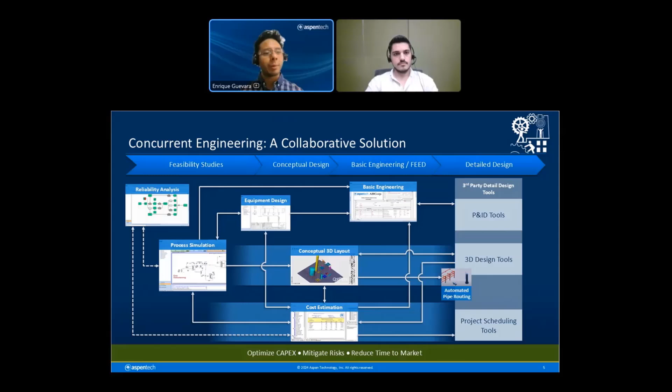So the idea of concurrent engineering is that we have all of these different integrations between these AspenTech solutions that allow us to keep data consistent. The information we get from simulation can seamlessly go to the cost estimate or to basic engineering for deliverables. And we are able to do this fast, reliably, and consistently. So this is a little overview of concurrent engineering, and a little later we're going to zoom in and show what part of this workflow Tekfen was able to use for their use cases.

Before that, I want to use this information about integration, collaboration, and a better, faster workflow to talk about how this integration is able to accelerate your speed. Having all of these engineering branches working together and keeping data consistent, we can have better visibility of the overall project. We can have the process simulation on one side, but also the 3D model. So we're not only looking at the process conditions, but also any space, cost, or material restrictions. We can look at all of them at the same time and have a better and feasible design at a faster pace.

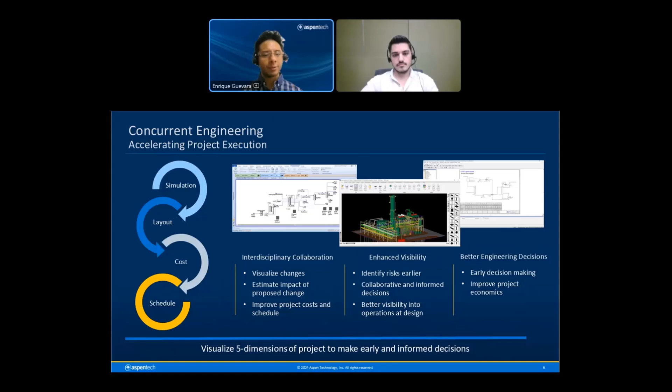We can also identify risk earlier. We can have better collaborations. We can seamlessly transfer information from one portion of the process to the next one, avoid as much as possible manual errors, typing errors, and achieve overall consistency for earlier decision making and better results at an early stage.

So from this big workflow that I showcased earlier, for today's presentation we're going to focus on these three: process simulation, cost estimation, and conceptual 3D layout. In today's use cases that Tekfen will present in a couple of minutes, they will show how they used these three solutions for specific cases. For example, how they used simulation to do equipment design, a column design, and then how they transferred this information to cost estimate.

Be able to do some optioneering, some modifications, and answer questions that allow them to get a good estimate early in the life cycle, and then how this estimate was also able to assist them to create a good layout, again early in the life cycle, that brought better visibility and helped them mitigate any risks that could present down the line.

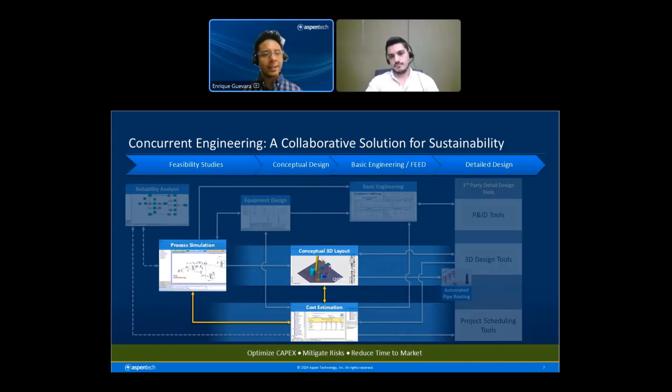So before I hand it over to Mr. Volkan to show their use cases, I want to use a couple of minutes to bring everyone up to speed on these three solutions. I think almost everyone will be familiar with our process simulation solutions, which include Aspen HYSYS and Aspen Plus. These are state-of-the-art process simulators that can simulate pretty much any chemical or petrochemical process. So we can use these two solutions to get the design part out of the way, and then use our cost estimation solutions, which are consistent from the earliest to the latest stages, not only construction, but also operations and maintenance.

And we're able to generate reliable cost estimates using a unique model-based cost estimation that, again, is unique to AspenTech. This uses empirical information instead of just allocating percentages to piping, to instrumentation, to steel, and other material takeoffs. Instead, what AspenTech does is rigorously simulate how many pipes you will need, what the size of these pipes is, and how many fittings each pipe needs.

Same goes with steel. How much steel do I have? Instead of going with a percentage, it actually designs or calculates how much steel we will require and uses this approach to generate reliable cost estimates. And on the other side, of course, we also have our 3D layout modeling tool. In this case, we're talking about Aspen OptiPlant 3D layout.

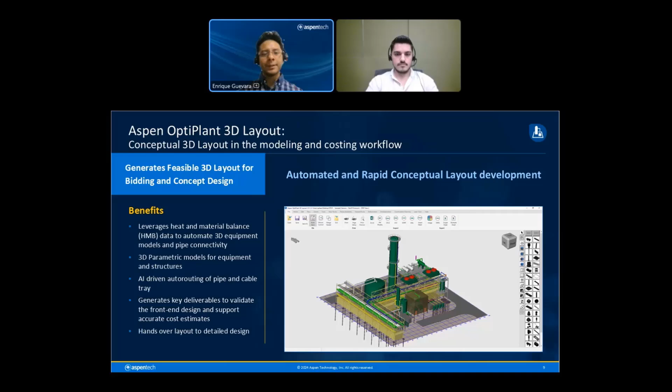So with this out of the way, I would like to hand it over to Mr. Volkan. He will be presenting two use cases. I'll give the stage to you. Thank you very much for handing me over the presentation. Thank you, Enrique, for introducing me.

So today I will talk about the use cases of AspenTech tools at Tekfen Engineering, how we use them, how we leverage them, how we accelerated the combined simulation, estimation, and 3D. So let's go ahead and continue. We will look at Tekfen, what we do here, and then we will continue to the first case study, how we leveraged HYSYS, ACCE, and OptiPlant all together concurrently for early engineering. And then we will see how we leveraged all these tools together for the proposal stage in the second case study.

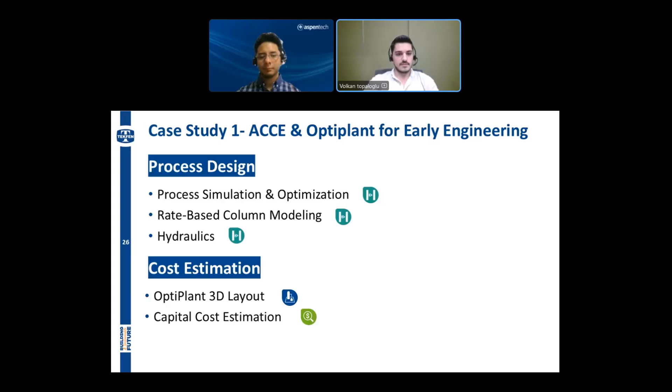Column hydraulics, I think, is very useful; it is a built-in tool for column hydraulic performance. You can make detailed hydraulic calculations embedded in HYSYS. You can calculate and find the diameter of the column. You can optimize gas-liquid traffic, and you can also monitor your changes as well.

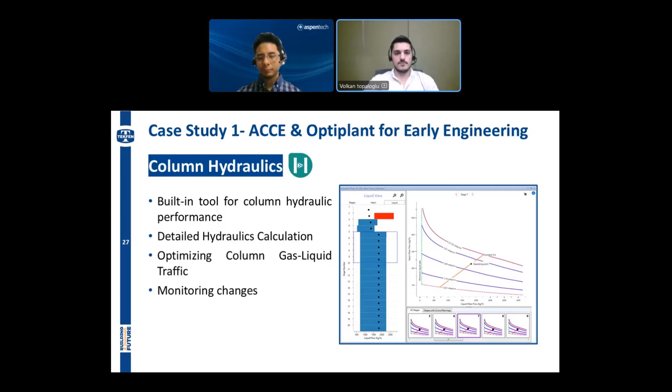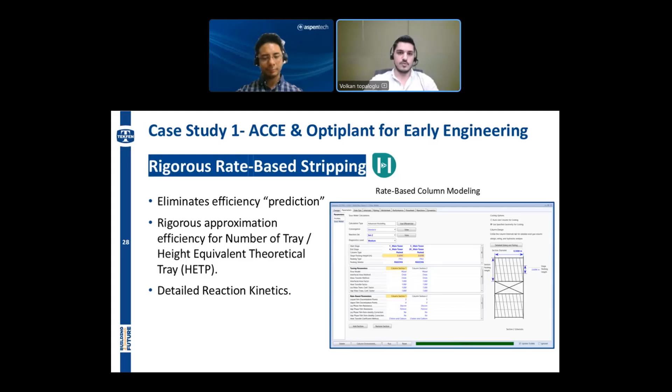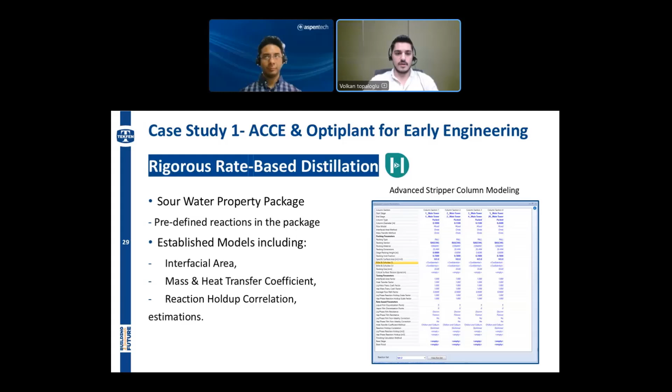So for the integration part, I will discuss how we integrated all these tools together. First, as input data, we have feed composition and the design basis. After this, as I described previously, we have rate-based distillation and optimization, and we also leverage example files embedded in HYSYS.

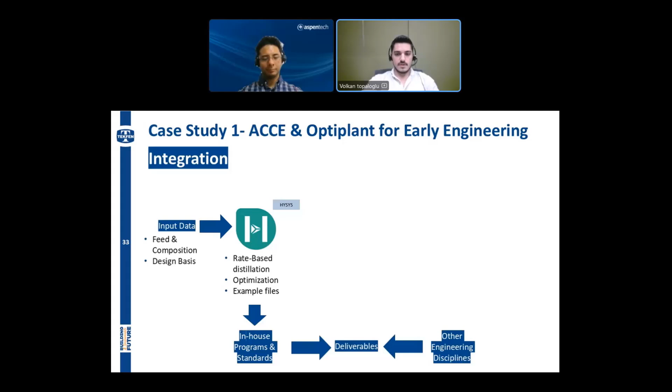We also have some in-house programs, and we use standards. For in-house programs, we also use the hydraulics part for the pipes as well. As deliverables, we work with other disciplines such as civil, instrument, and so on, which we will discuss later.

For the cost estimation part, we will see the estimate progress over time, from HYSYS to the capital cost estimator. Then, the deliverables we produce here are used as input data for the capital cost estimator.

Also, here we leverage OptiPlant to find the proper pipe length, layout area, and rack dimensions. As you can see, we have an output from the 3D layout, the automated piping. After that, we are preparing the cost estimation report, as shown here.

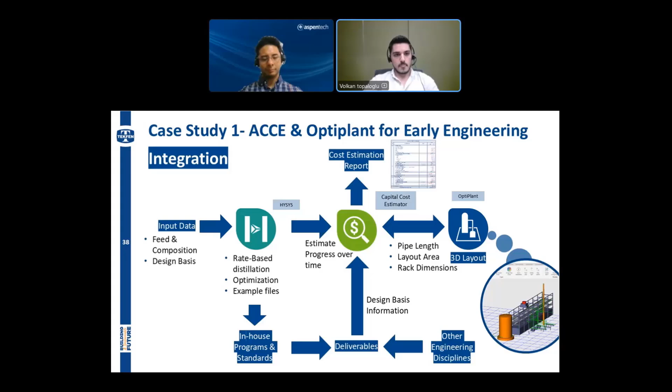Let me discuss the project stages that we use at Tekfen Engineering. As a process, we start the project with previous projects and standards. After that, we issue the process flow diagram, the PFD, in the second month. As you see, we also start the P&ID in the second month.

Then we issue the data sheet and P&IDs in the third month. After that, the instrument, electrical, and piping departments all come together and we work together, and then we deliver these files to the process, mechanical, and electrical departments. After the 5th month, civil continues on the project, and the project goes on.

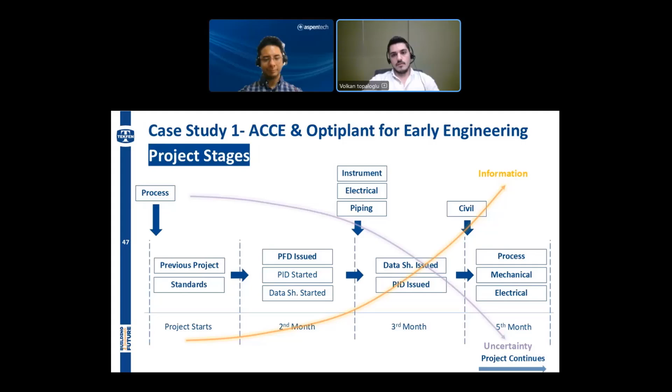As shown here, as the project progresses as expected, uncertainty goes down and the information increases. In the next slide, we will compare the cost estimation stages. So in this chart, you will see the data that we fed into the tool, for example HYSYS.

If you use HYSYS, we put an X here. If you use Go-By PFD, we put an X here. No issued PFD is marked with a minus. No issued PFD and no data sheet is also a minus, for example. There is no OptiPlant used here, and no P&ID, line list, or layouts used here.

Also, at the start part, we are at the very start of the project. What we do is open the Aspen Process Economics Analyzer in HYSYS, and what we find is around a 44% error compared to the proposal cost.

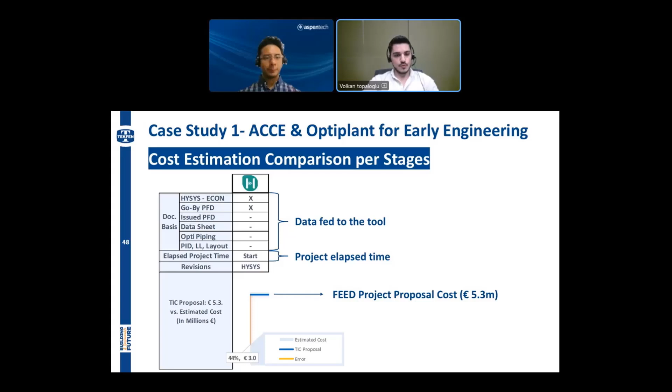Here you see the 5.3 million estimated cost at the end of the FEED project. As Tekfen Engineering, we worked on this project for more than 7, 8 months and found the 5.3 million euro cost. As I said, there is a 44% difference when you open the HYSYS cost tool - you get 3 million euros.

After this, actually the thing is, we have no effort here. We haven't defined any process flow diagrams, information, etc. There is nothing - just open the tool's embedded cost part, and you will see 3 million.

After this, we deliver all that information to Aspen Capital Cost Estimator. We are still using Go-By PFD information, and the project has not started yet. But the very surprising part is a 15% difference with the TIC proposal cost, which I think is very accurate for this project, even though it hasn't started.

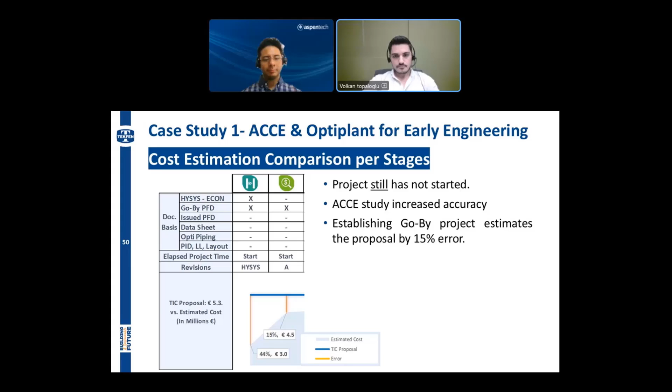In the next slide, we tried leveraging OptiPlant here. As you see, there is another 2% increase here. We are still using Go-By, and there is no additional work here - what we did is use pipe size information from OptiPlant into the Aspen Capital Cost Estimator.

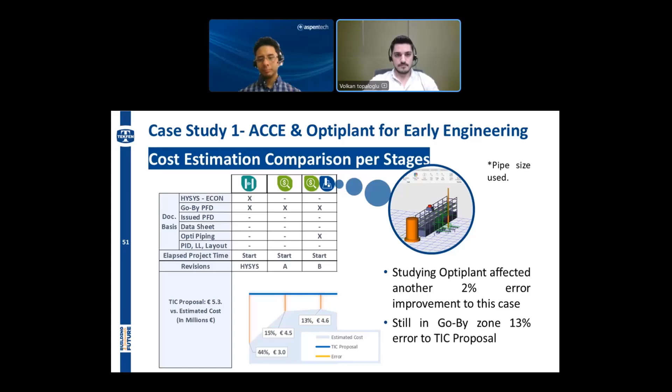After 2 months of work, we delivered the process flow diagram, and then we prepared the PFD, and the cost diverged a little bit because we deleted some equipment.

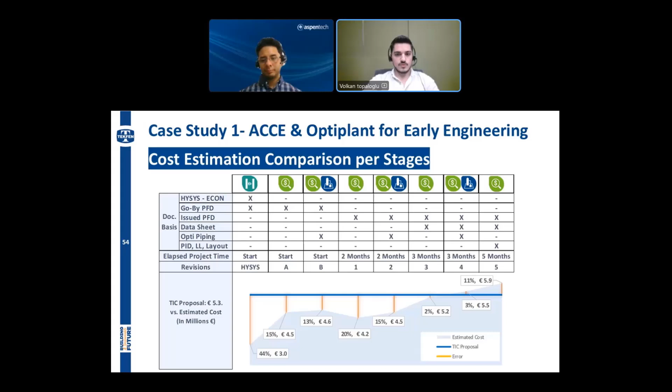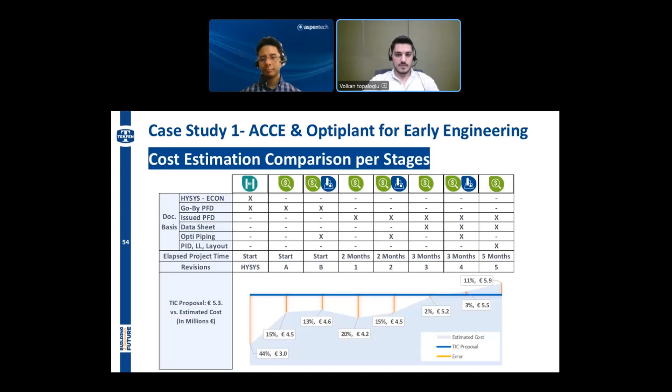And then we revised the Aspen Capital Cost Estimator accordingly. After that, we also used OptiPlant in this part. We have a 5% increment here. For the third month, we used datasheet and issued PFD information. If we use both of them, a special datasheet from process department information, we have a 2% error, as you see.

After using OptiPlant, we will also have another 5% increment, which takes a 3% difference with the TIC proposal cost. After that, at the end of the project, if you use PNIDs, our line lists, our layouts, without using OptiPlant, also we have issued datasheets and PFDs, we will diverge a little bit more from here. I think it is very acceptable costing here as well.

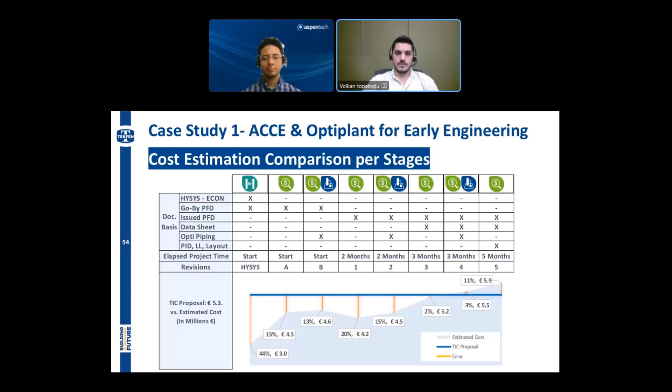As I said, we have this type of flow at Tekfen Engineering. As you can see, this is the gap. This is the stages when we use Aspen Capital Cost Estimator for each stage.

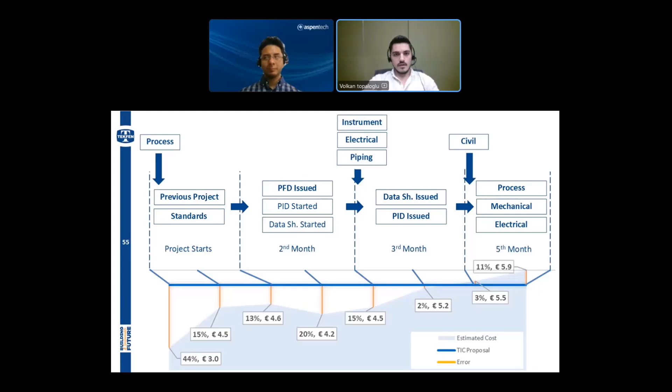Next slide, let's discuss the results. We think using Aspen Capital Cost Estimator and OptiPlant together for the early engineering phase is very beneficial because it accurately estimates cost, as I discussed before. I think it's very important that before even starting the project, you will get a very decent amount of error.

Also, after using OptiPlant, you will foresee the layout field limitations in the field. You will find the accurate piping length and duct dimensions, which affects a lot. Also, we leverage automated piping from OptiPlant, and we worked for alternate piping. You can work with alternate piping routing solutions and investigate the affected cost of the model. Also, having a 3D model from the start, you can iterate throughout the project.

So the next case study, let's discuss the proposal stage where we used all concurrent tools together for a glycol dehydration unit.

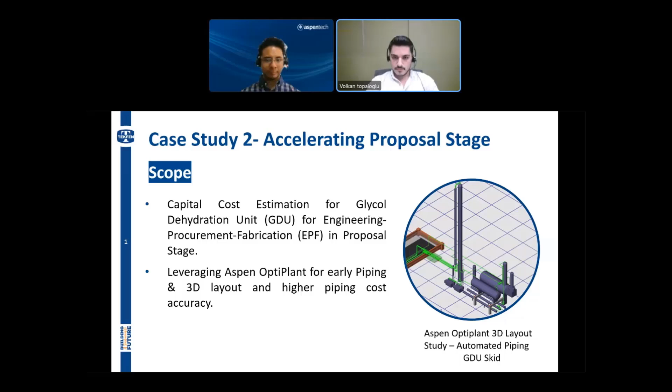So the input data for this proposal project was technical specification from the customer and field photos, feed rates, compositions, earthquake regulations in the field, wind speed, and site conditions. We also selected the material accordingly. We have a customer go-by PNID.

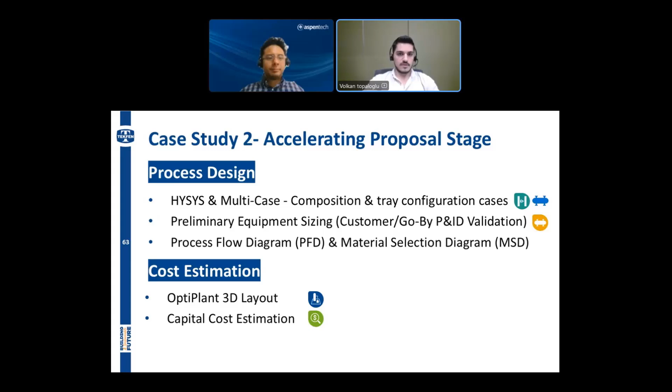For the process design part, we used Aspen HYSYS, multi-case here. Also Aspen EDR, the Exchanger Design and Rating Tool. For the process flow diagram, we prepared PFD and MSD here. What we did for cost estimation is use Capital Cost Estimator and OptiPlant together.

For the multi-case part, we used not only HYSYS but also multi-case as well. So here, what you can do is find your optimum number of trays for a tower, for a column. You can work a number of different cases in your HYSYS configuration.

You can see the sensitive points in your design, in your configuration, and what you can do is change the number of trays from Aspen HYSYS and then create different files for the number of trays, and then run the Aspen multi-case for different parts, for different compositions or feed rates, and then find the resulting composition.

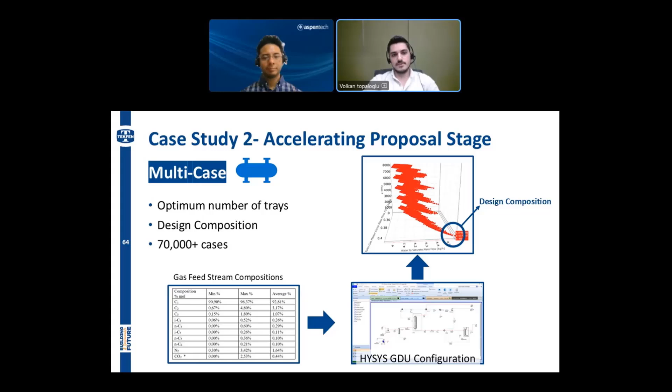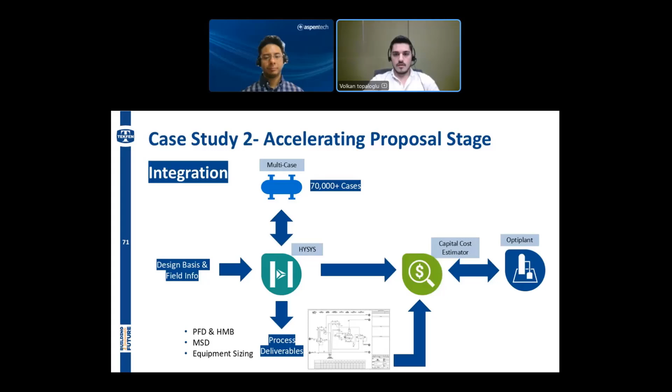After that, we find the design composition here, more than 70,000 cases, also the optimum number of trays. We deliver all that information to Aspen Capital Cost Estimator. After this, we also use OptiPlant here as well. And then what we do is prepare the cost estimation report for our proposal department.

Next slide, let's discuss the results and benefits of using these tools together. The integration enables rapid and accurate cost estimation for proposals in terms of weeks instead of months.

I think it is very important. If you go and ask the vendor about the cost, they will need a couple of months to estimate it. But here, you can have rapid cost estimation from Aspen Capital Cost Estimator. This integration took around 2 weeks to prepare these deliverables together and then prepare the cost estimation report.

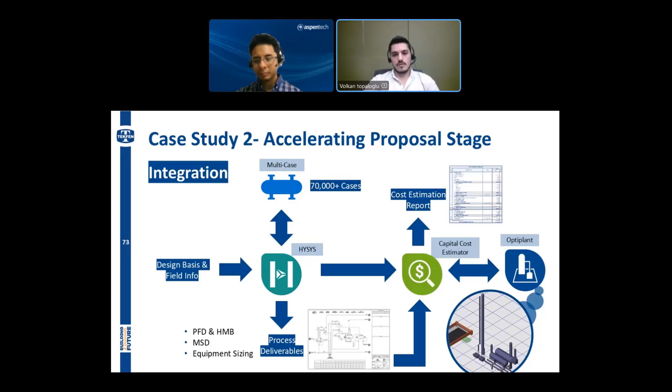I think using the tools concurrently makes your preparation very fast. So also, as we discussed in the previous case study, we have accurate cost estimation for engineering, procurement, and fabrication proposals here, especially.

We can also foresee the layout and field limitations by implementing Aspen OptiPlant here. You will get also the piping lengths that you need for cost estimation.

Also, if you change the feed rates or composition, etc., since it's very integrated with HYSYS and OptiPlant, you can make a seamless connection between them and deliver all that data from HYSYS to OptiPlant. I think also conceptualizing a 3D model increases proposal success, which is very important for a company.

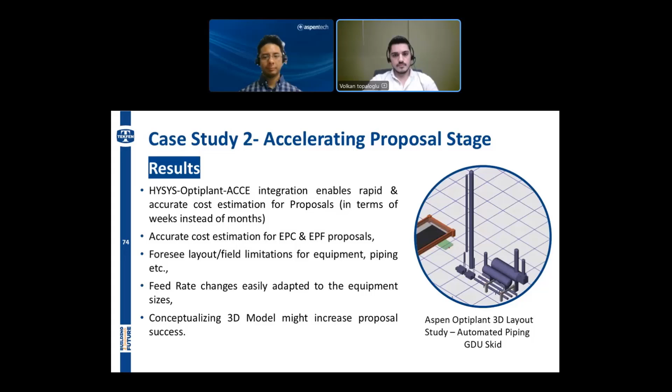So I think that was it. Thank you.

All right, thank you very much, Volkan. So just to recap the story that Volkan presented, he was able to leverage concurrent engineering for two separate use cases, sour water stripping and glycol dehydration, which are a little bit different in terms of the industry we're talking about.

But at the end of the day, he was able to use the same solutions in different methodologies to optimize the simulation part and the operating conditions to reach the desired outcomes from a thermodynamic point of view, as well as getting all of this information to the cost estimation group, so we can use this unique model estimation methodology that we have in AspenTech to prevent going with vendors, or to just get a better result faster.

You were able to see this in the first use case that Volkan presented, just by using HYSYS and its integrated module for automatic economic evaluation. He was able to get a number close to a 44% error. But as soon as he integrated more and more information, he quickly jumped in just a couple of months from an initial ballpark estimate all the way to something as close as 5% error.

So I think this speaks about the value of having this consistency, this integration between the solutions, having the ability to route pipes and use realistic quantities in our cost estimate instead of just running with defaults or approximations. We can get very good results very fast in the life cycle, and use this information to make better decisions.